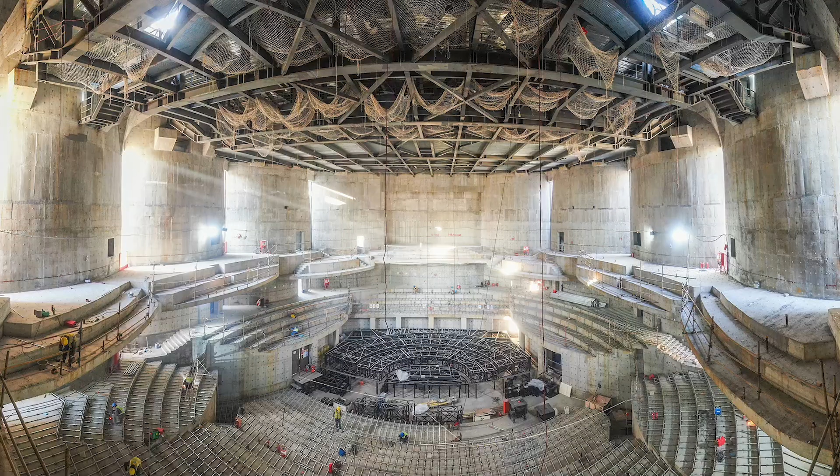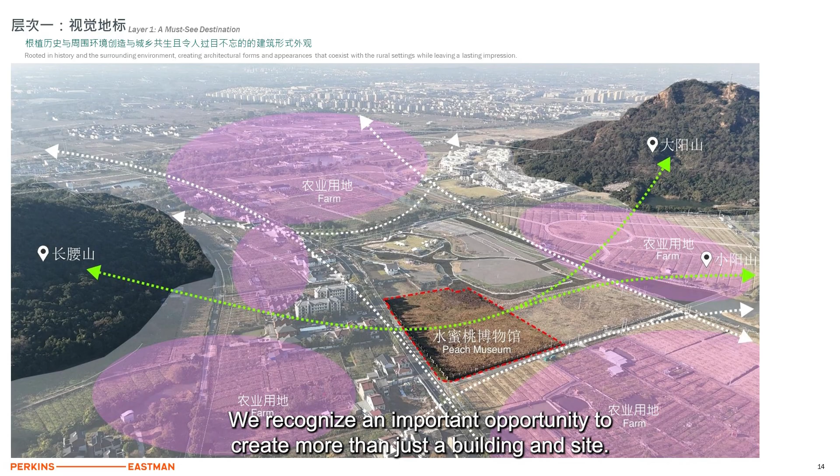We're fascinated by the potential of this Peach Museum project and the way it combines traditional museum exhibits with immersive environments, its integration of research space and meeting space, and its strong connection to the region. We recognize an important opportunity to create more than just a building and site. This can be a place that is richly layered with meaning.

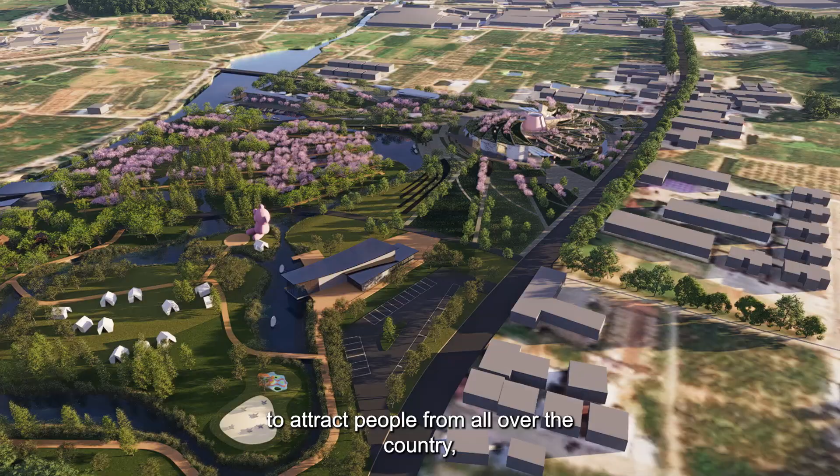It will start with how it looks. There's a high standard for how memorable a place must be to attract people from all over the country, and we feel we've crafted a design that will do exactly that. But this is more than just an aesthetic gesture. As with a person, there is truth under the skin, an emotional response, particularly given the significance of the topic of peaches and peach blossoms.

These emotions touch on a great tradition of Chinese poetry and painting. Our architecture aspires to work on that poetic level as well.

Then there's the historical dimension. The project and its museography should convey the deep historical context of peaches in China, a history thought to be more than 6,000 years old.

Another dimension of this project is the educational potential. The process of peach cultivation, a mixture of science and artistry that has developed over millennia, is fascinating and important. This can be a place where we teach future generations the beauty and importance of the craft.

And finally, we see a rare opportunity to make a museum that doesn't just show. It plays a role in the production and distribution of peaches. This will make it a unique museum experience.

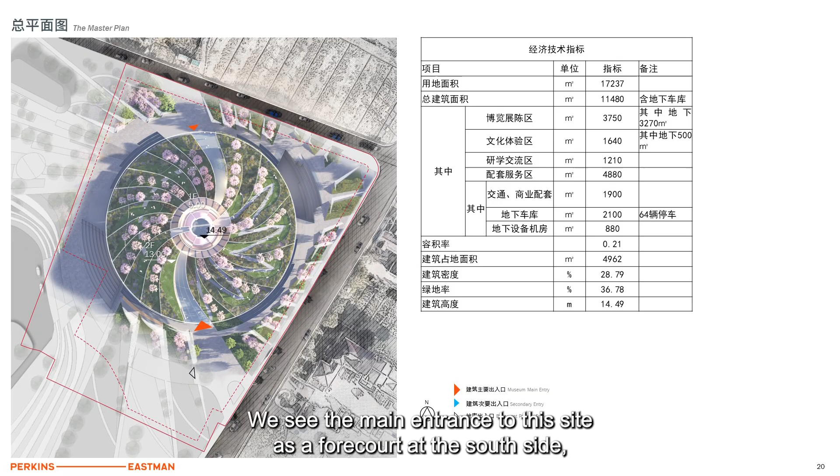Let's look at the project's fundamental organization, starting with the building itself. We see the main entrance to the site as a forecourt at the south side, allowing building entrance from the south in accordance with traditional planning principles for cultural buildings.

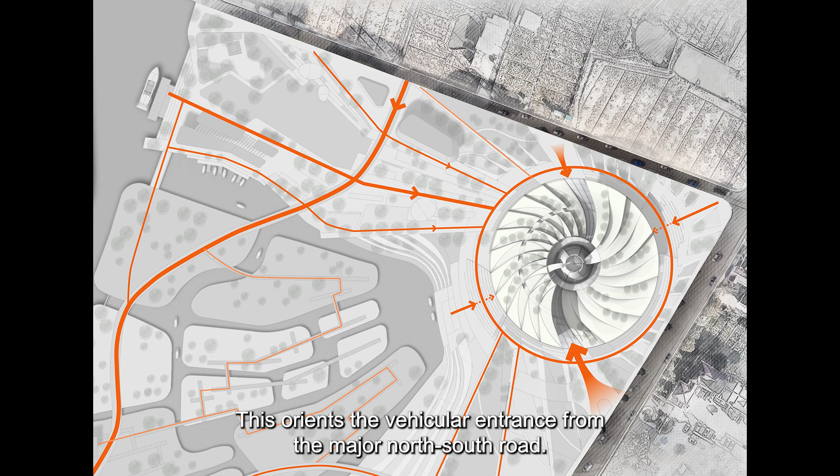This orients the vehicular entrance from the major north-south road. Parking access will also be from the southern zone and is fully accommodated below grade. A secondary entrance is from the smaller east-west road.

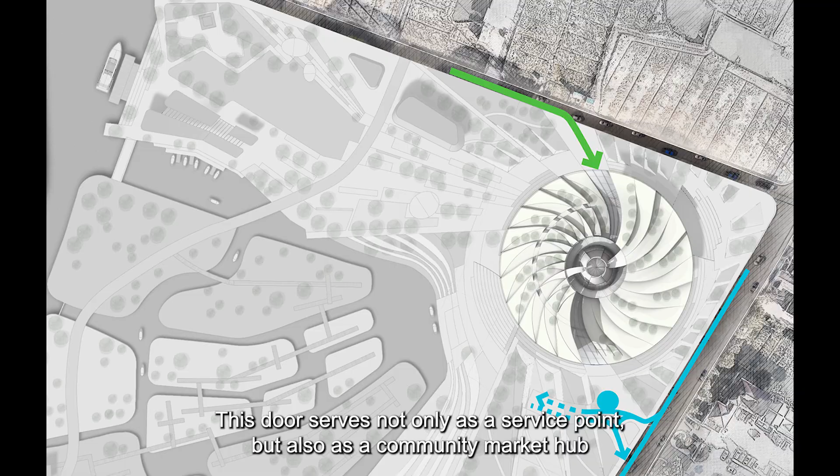This door serves not only as a service point, but also as a community market hub for sharing locally grown products year-round. It is a working connection between the surrounding farms and the museum.

Turning to the site, ecotourism continues to be a rising trend, and this project represents a rare opportunity to create a strong connection between nature, architecture, culture, and a sense of adventure.

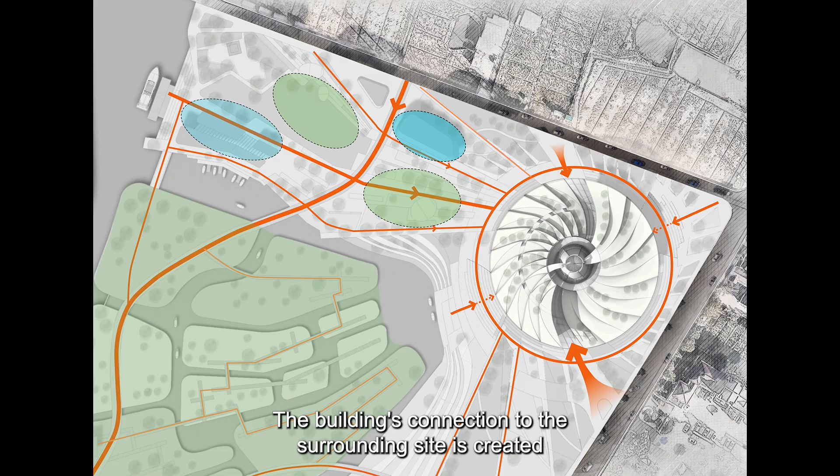The building's connection to the surrounding site is created with a network of walkways and waterways that extend the mission of the museum outward around the park and extend the fun, family-oriented character of the camping areas onto the museum grounds.

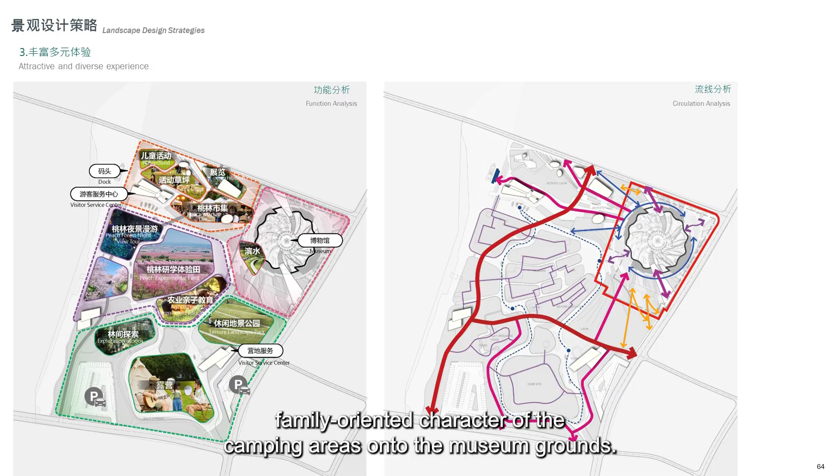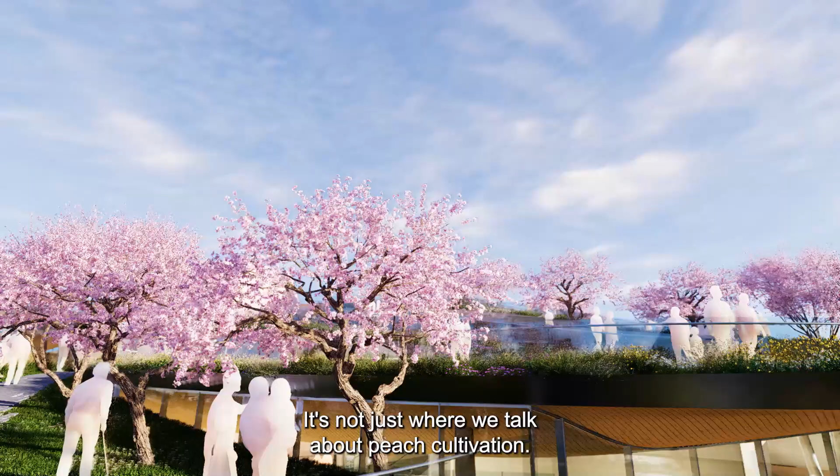We call our concept Harvest. It is thematically ambitious, aspiring to be a truly unique museum experience. It's not just where we talk about peach cultivation, it's where the cultivation happens.

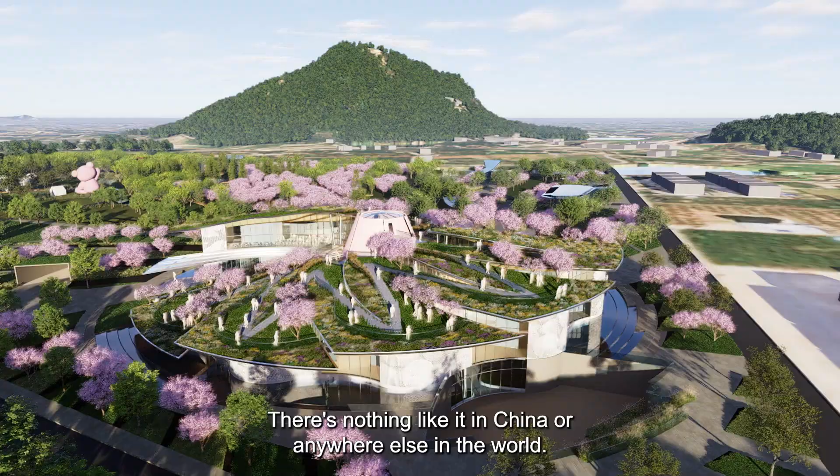It's equal parts experimental landscape design and bold architecture. It rises up from the earth to reveal, demonstrate, and celebrate. It is a working museum, a place of production. There's nothing like it in China or anywhere else in the world.

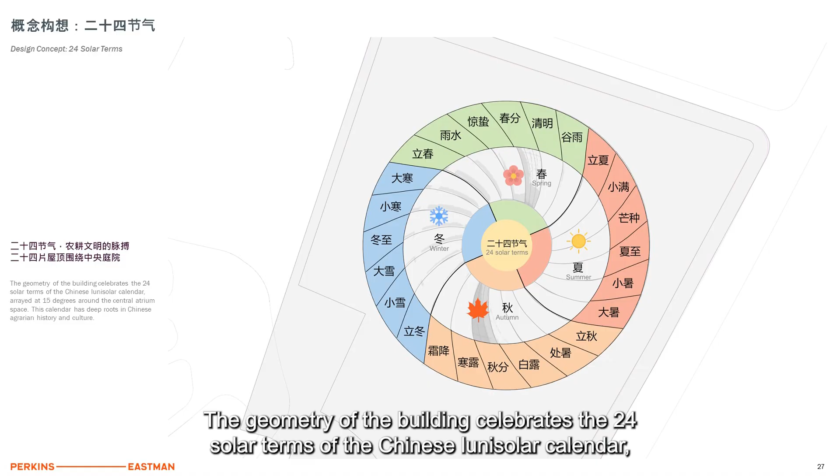The form of the architecture draws its meaning from elements of culture and science. The geometry of the building celebrates the 24 solar terms of the Chinese lunisolar calendar, arrayed at 15-degree increments around the central axis of the museum. This calendar has deep roots in Chinese agrarian history and culture.

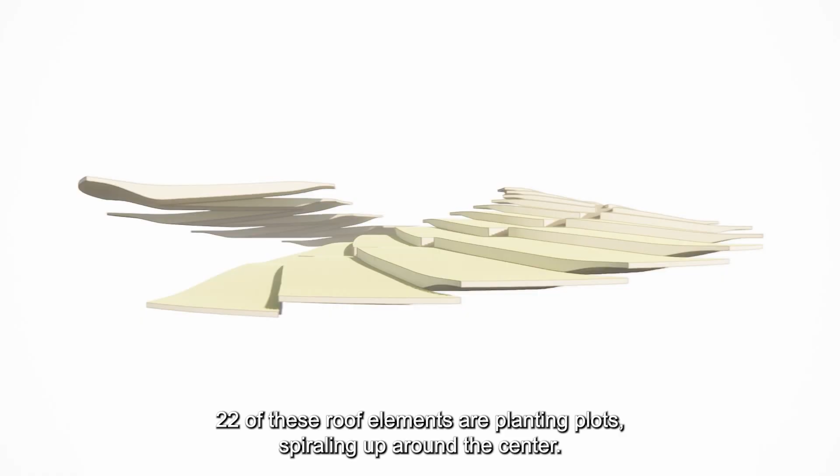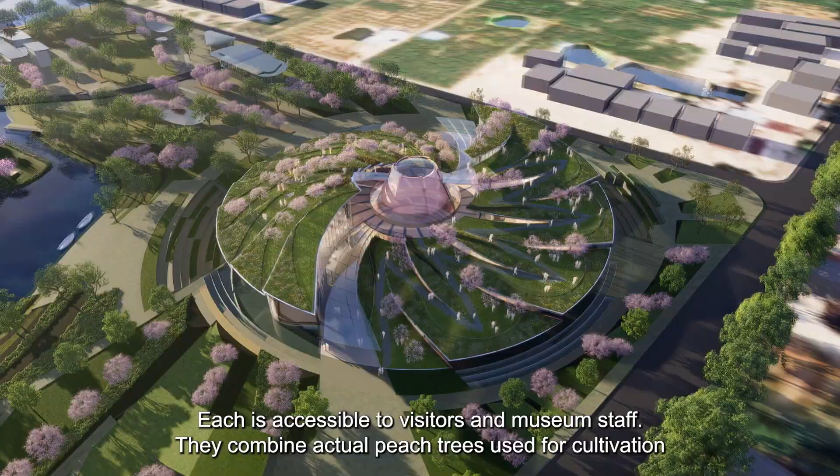22 of these roof elements are planting plots, spiraling up and around the center. Each is accessible to visitors and museum staff. They combine actual peach trees used for cultivation with an interpretive gardenscape that will be attractive year-round.

The whole building is a sort of machine for peach cultivation, with the formal museum entrance at the south and a more informal community front door anchored at the north. The museum experience is not restricted to the interior space.

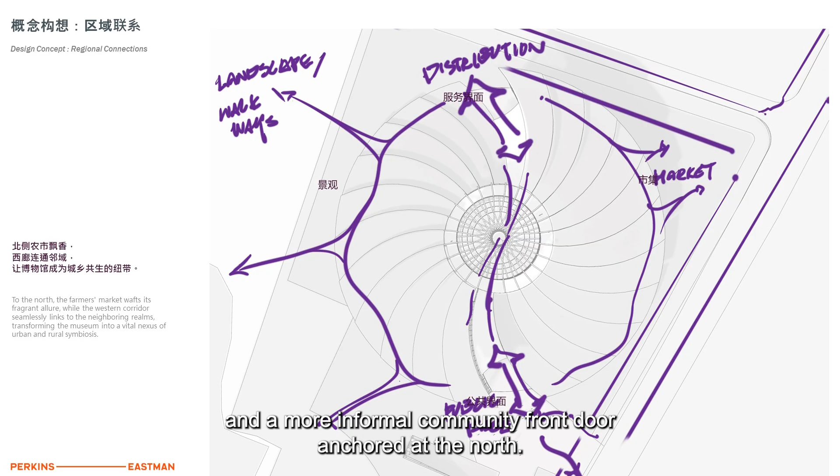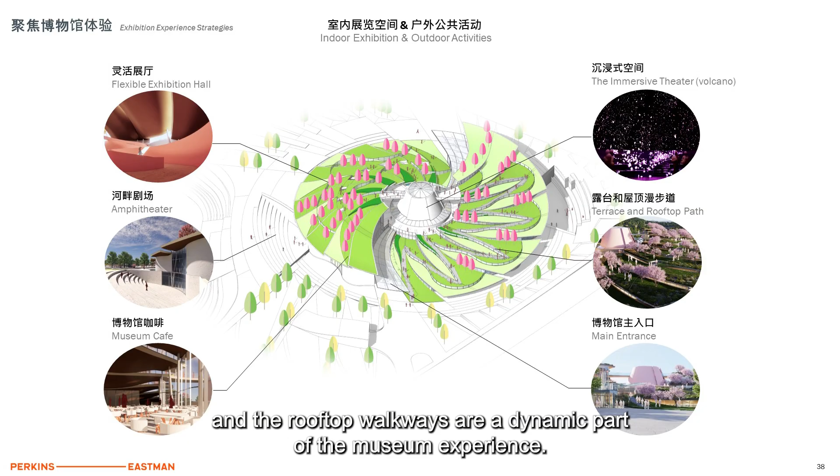2 amphitheaters create outdoor convening spaces, and the rooftop walkways are a dynamic part of the museum experience. The bilateral organization of the building expresses balance, balance between production and consumption, between work and leisure, and of course between the missions of the museum program: exhibition, research, meeting, and education.

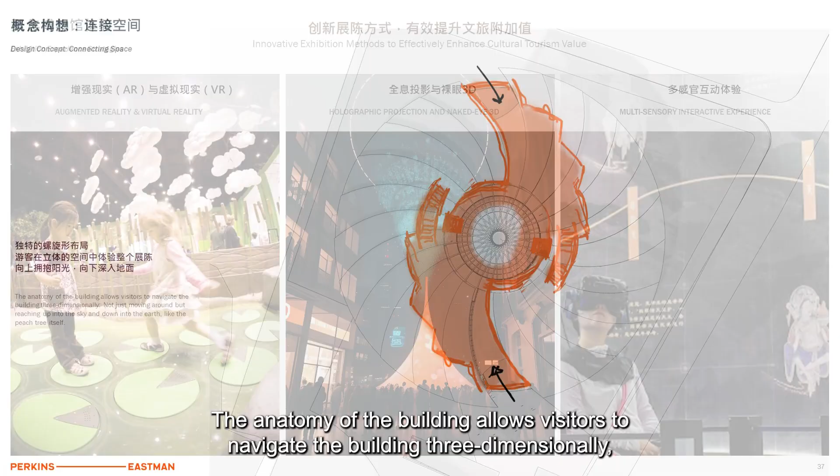The anatomy of the building allows visitors to navigate it three-dimensionally, not just moving around horizontally, but reaching up into the sky and down into the earth like the peach tree itself.

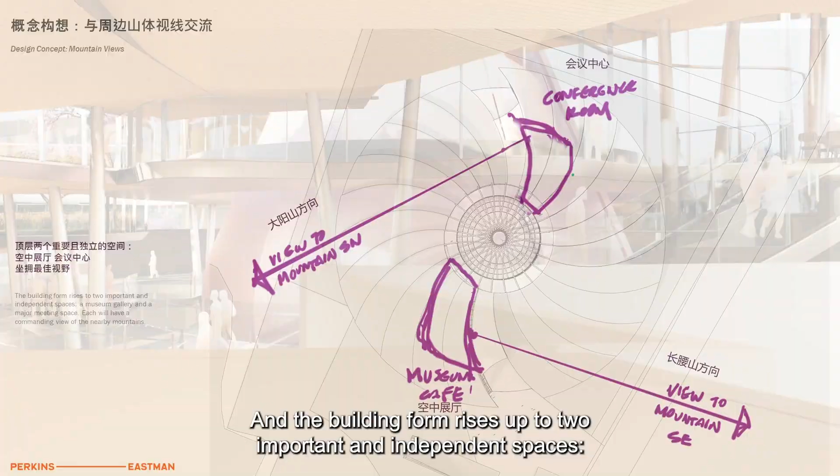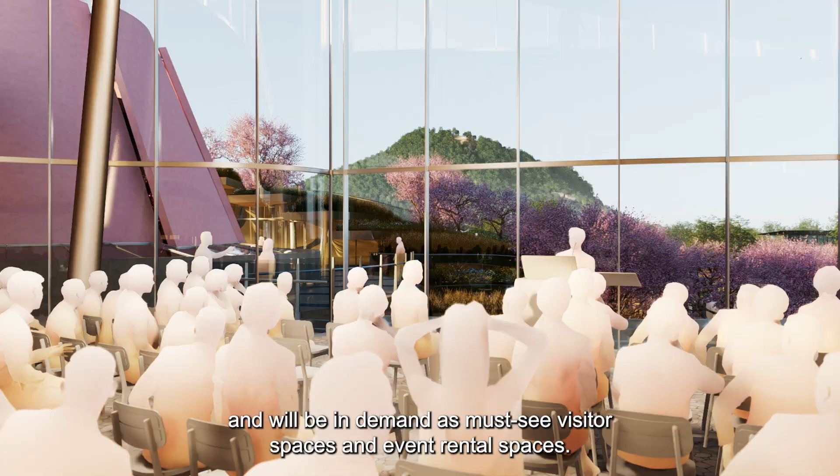The building form rises up to two important and independent spaces: a museum cafe and a major meeting space. Each will have a commanding view of the nearby mountains and will be in demand as must-see visitor spaces and event rental spaces. The epicenter of the building is an abstraction of volcanic form, recognizing the fundamental importance that volcanic soil plays in the success of peach cultivation in this region.

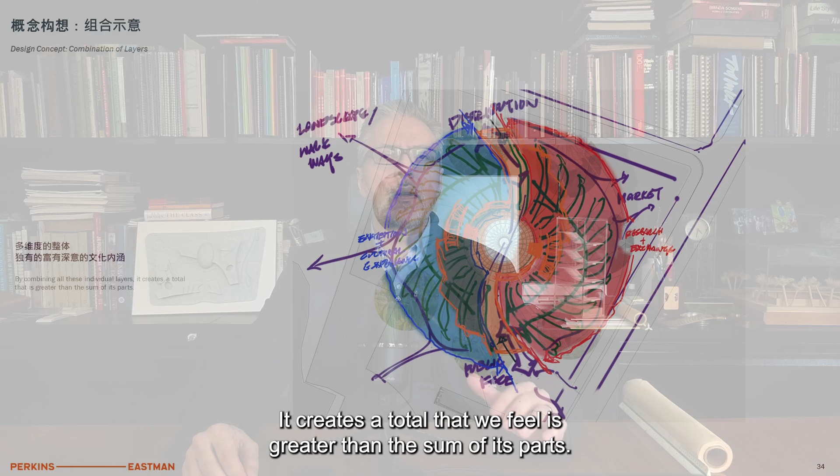The interior experience here will be extraordinary, and we'll describe that momentarily. The layering of all these meanings is important—it creates a total that we feel is greater than the sum of its parts. The form of the building is by nature aspirational, reaching up to the sky to capture light, water, and views.

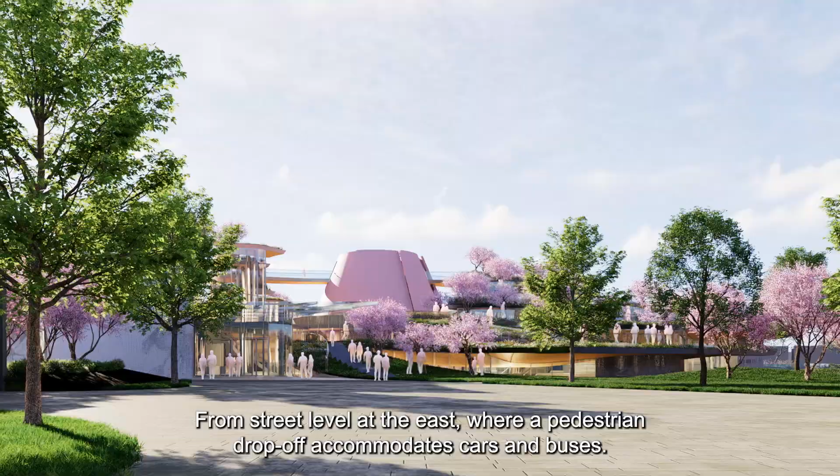Now let's focus on how these forms and spaces translate into the museum experience. Visitors will be able to arrive at the museum from several different vantage points: from street level at the east, where a pedestrian drop-off accommodates cars and buses. From here, cars can descend into the below-grade parking structure, where direct entry is also available for visitors.

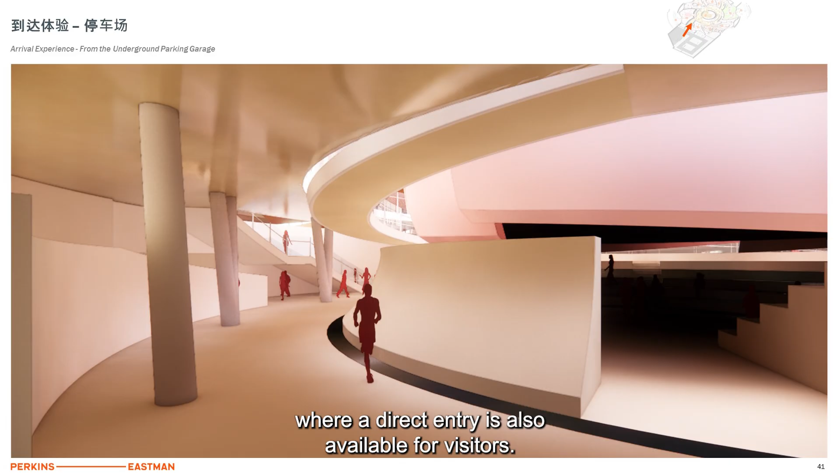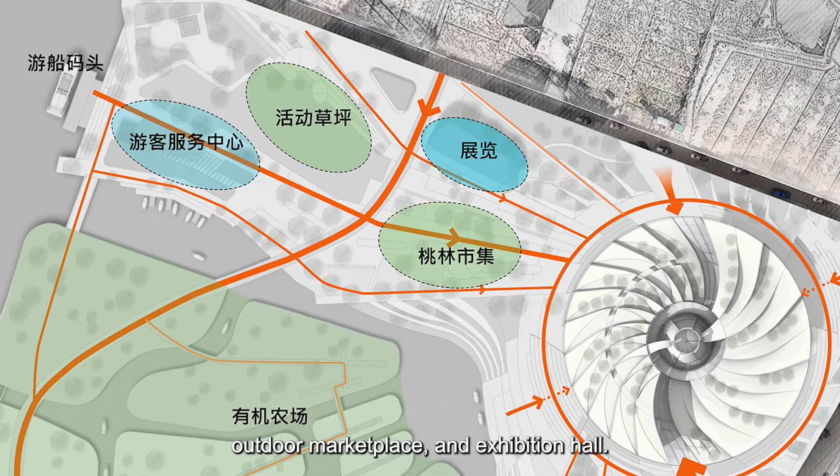Other visitors will arrive from a docking point at the river, where an elegant promenade provides a distinct experience from a visitor service center, across an event lawn, outdoor marketplace, and exhibition hall. Small-scale waterways within the park are also access routes for visitors within the park zone to reach the museum grounds.

At the entry level, a large central circulation zone provides clear wayfinding for visitors. We picture 4 major public-facing spaces arrayed around this center, each with curated views to the exterior.

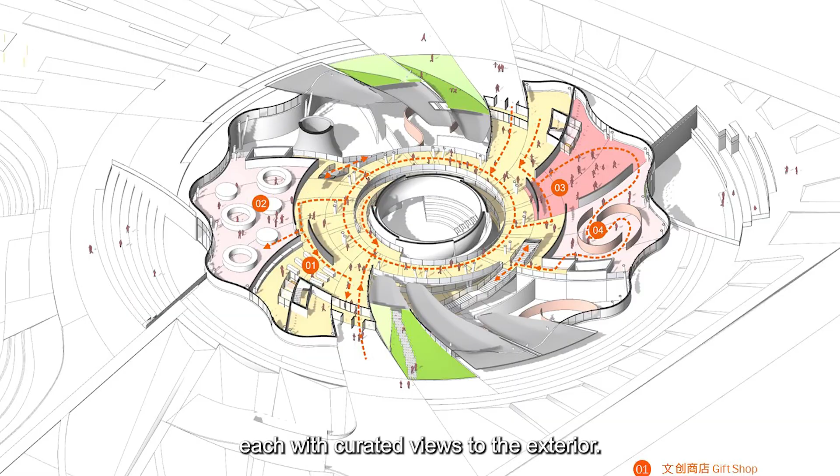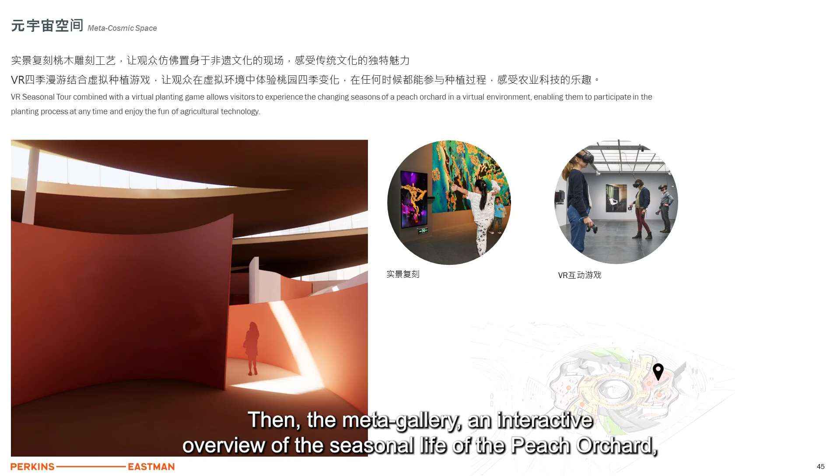First, the multipurpose hall is a flexible exhibition and community space. Then, the Meta Gallery, an interactive overview of the seasonal life of the peach orchard, where visitors can place themselves in the orchard and gain an overall understanding of the cultivation process.

Then there's the Creative Lab, where we're first exposed to the cultural and artistic resonance of the peach harvest, from art to poetry and literature. Visitors are invited here to a range of activities from the purely observational to the participatory. And of course, the gift shop plays an essential role for the museum, allowing visitors to carry away a physical memory of their experience here.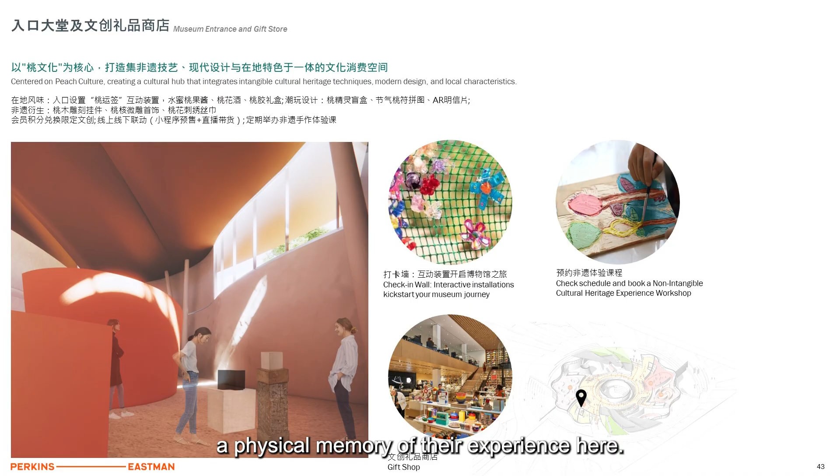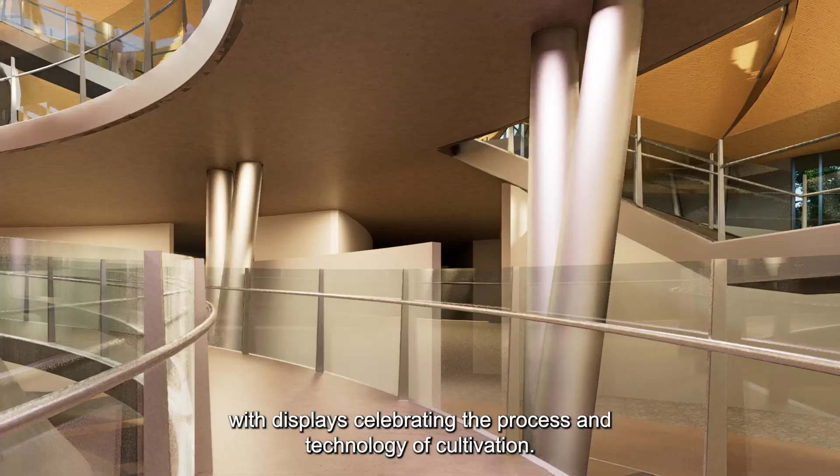As we descend to the lower level, we're figuratively and literally digging deeper into the meaning of the harvest. The ramp itself is an educational journey with displays celebrating the process and technology of cultivation.

The galleries at this lower level have an important organizational premise. They can be experienced enfilade, that is, passing directly from one gallery to the next. Or, for those needing a moment of respite, there's always the option to step out into the central circulation zone, where there's an airy and open feel with daylight piercing the interior and comfortable seating throughout.

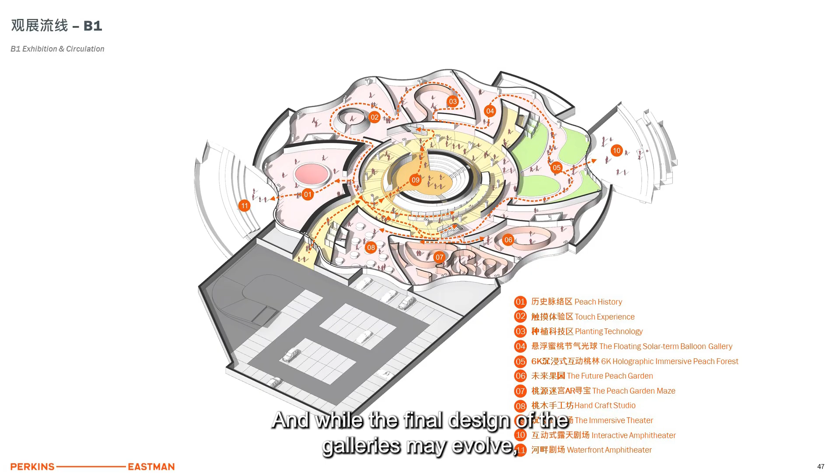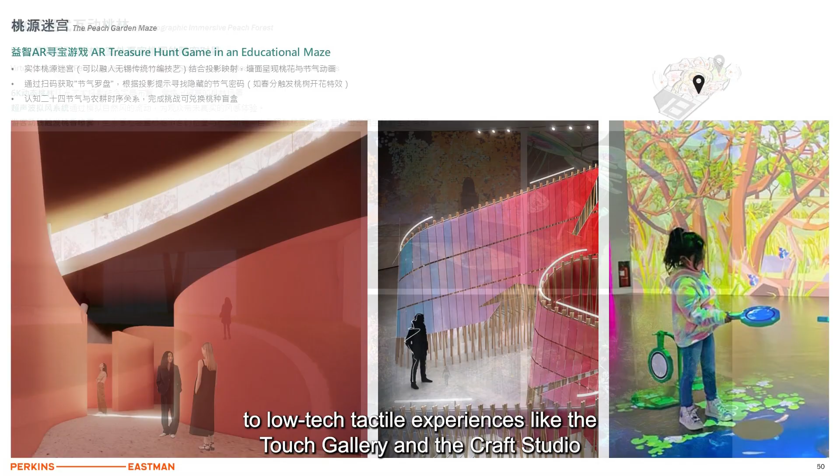And while the final design of the galleries may evolve, we've developed a vision for a suite of gallery environments that vary from high-tech spaces featuring VR and naked eye 3D technology to low-tech tactile experiences like the Touch Gallery and the Craft Studio, to the memorable experience of the Peach Garden Maze. At this level, we're able to modulate the penetration of daylight in service of this dynamic gallery experience.

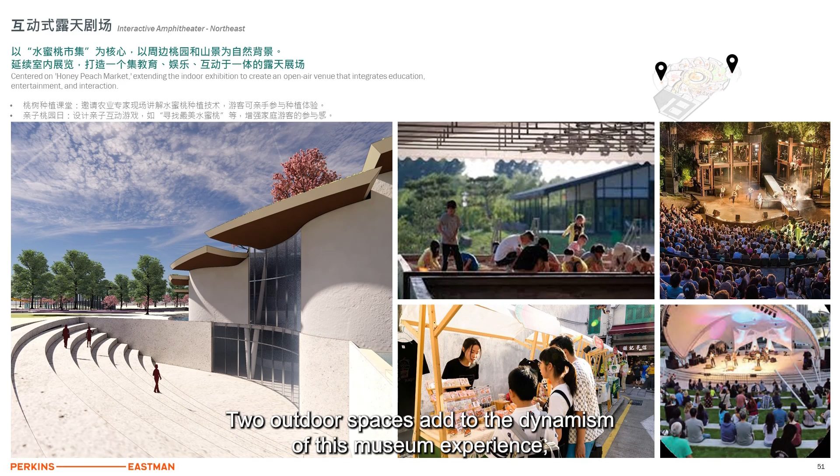2 outdoor spaces add to the dynamism of this museum experience, allowing for the exhibition of real plantings, or for a sculpture gallery, or teaching or performance spaces.

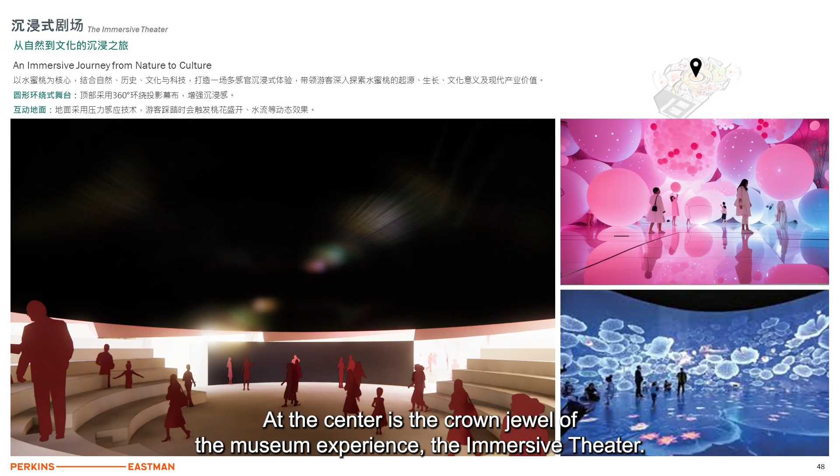At the center is the crown jewel of the museum experience, the immersive theater, architecturally inspired by the volcanic geology that is so important to this region. This 360-degree digital experience will transport large groups of viewers to a new level of understanding and experience. In this room, the environment can transform from an ancient forest to the interior of a volcano to the cellular matrix of a tree's structure.

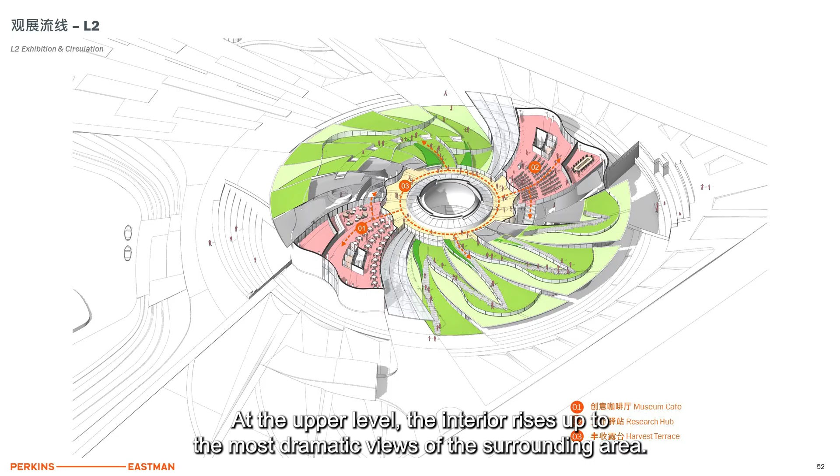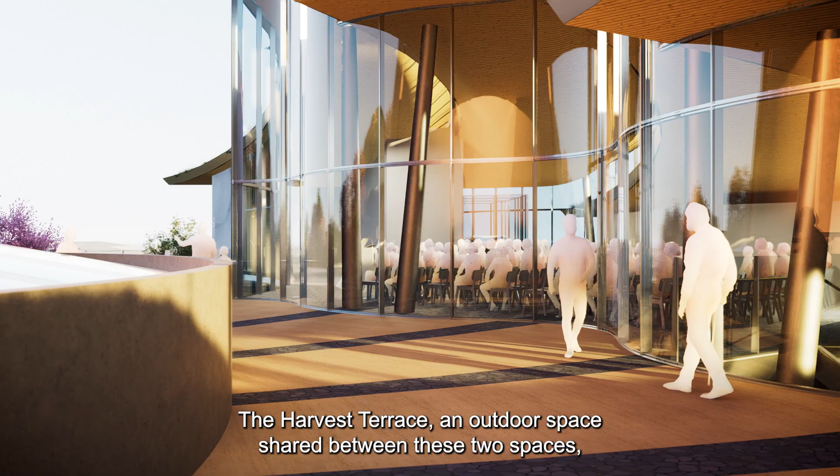At the upper level, the interior rises up to the most dramatic views of the surrounding area. The museum cafe will have a commanding view of Changyao Mountain, and the research hub will have an equally stunning view towards Dayang Mountain. The Harvest Terrace, an outdoor space shared between these two spaces, can be used as an extension of these spaces or for separate events.

The museum journey continues outside the walls of the building. The rooftop is first and foremost a formal garden experience in the tradition of Versailles, or the Villa d'Este, where we can delight in the shade of trees and the smells from flowers and the views of the surrounding landscape from a continuously rising elevation above ground.

Each side of the rooftop also has its own character. The meandering slow path on the east side includes seating areas, hammocks, outdoor exhibits, encouraging a thoughtful traverse. This side is gently sloped to accommodate the passage of wheelchairs and strollers. The network of stairs on the west side access a set of garden spaces with their own unique character.

Between these two sides, there is a reward for the visitors who've risen to the top. The Panopticon is a portion of the immersive theater that is only accessible from this level. This display is a modern take on the panorama. The panorama was the very first immersive exhibit from 1787, predating even photographic technology.

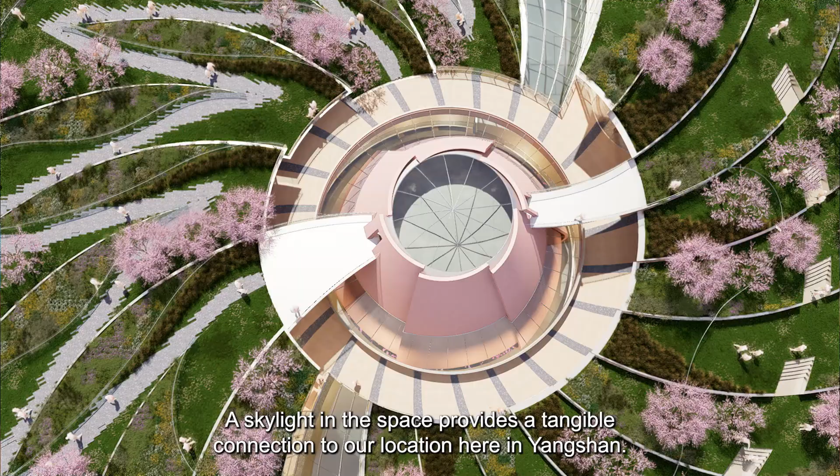Here, the 360-degree display allows visitors to look back in time or into the future, or to change their location to elsewhere in the world. A skylight in the space provides a tangible connection to our location here in Yangshan.

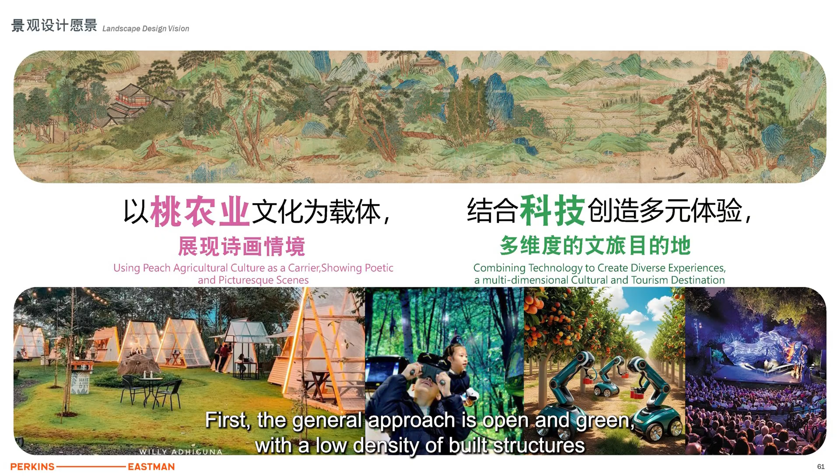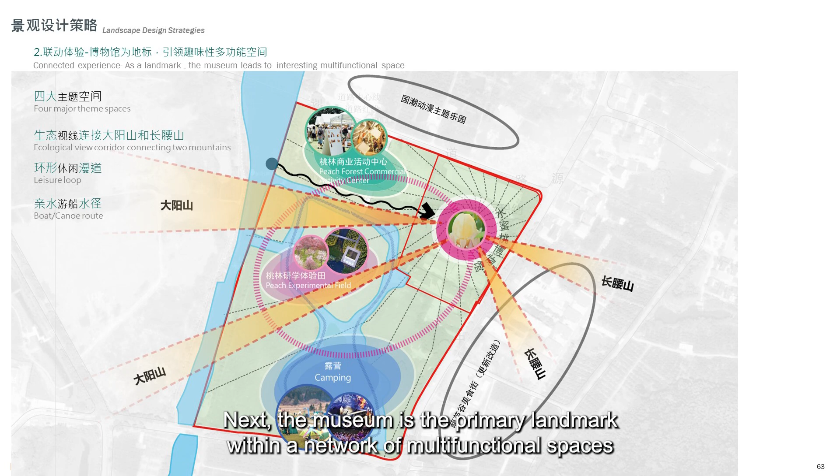The landscape design is based on a few fundamental tenets. First, the general approach is open and green, with a low density of built structures in response not just to the museum's mission, but also in recognition to its location among farmland and between the green valleys adjoining the nearby mountains. Next, the museum is the primary landmark within a network of multifunctional spaces connected by walkways and waterways.

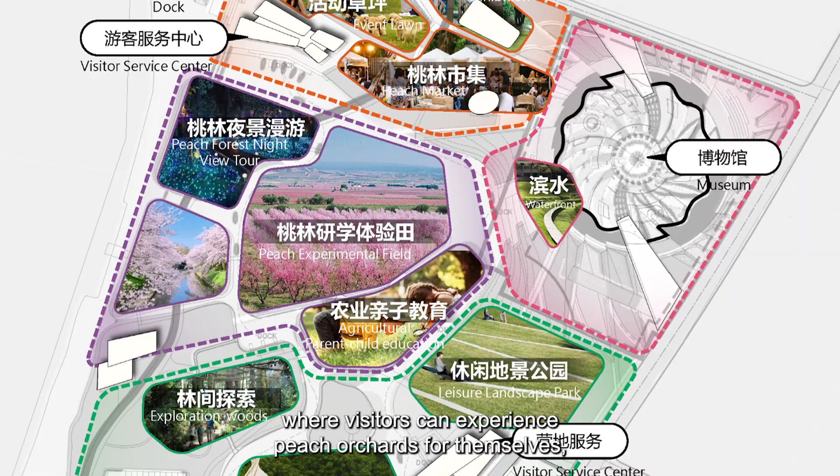Of importance to us is that these aren't just pathways, but also an opportunity to create real places in the landscape that are destinations of their own. The experimental peach field, for instance, where visitors can experience peach orchards for themselves, an agricultural education zone, a forestscape, an event lawn, and the existing campground as well.

In this way, seasonal changes can be celebrated throughout the landscape, while maintaining a beautiful year-round appearance on the museum building itself.

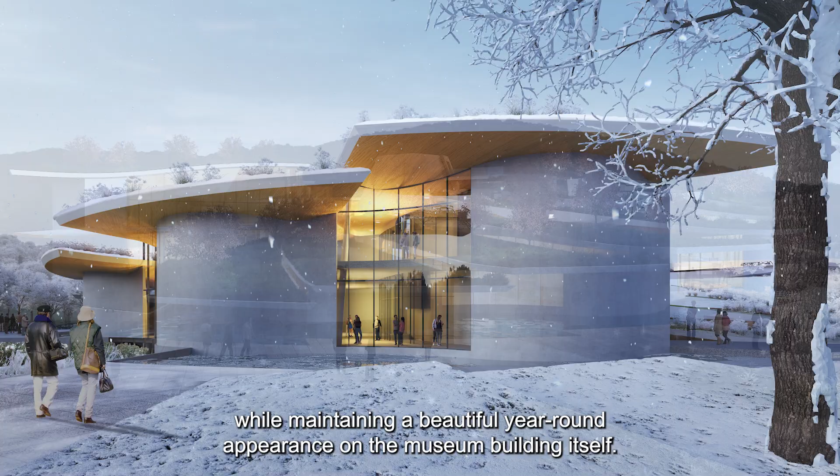The site and landscape are a good transition point to discuss sustainability for the project, because our most impactful initiatives begin here.

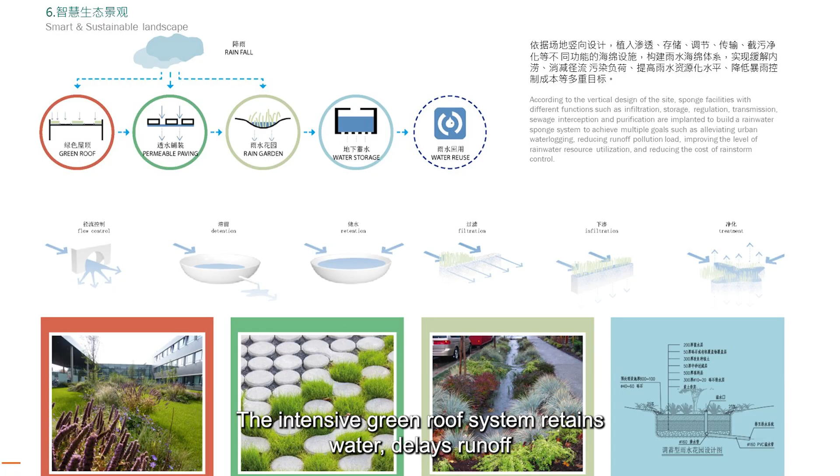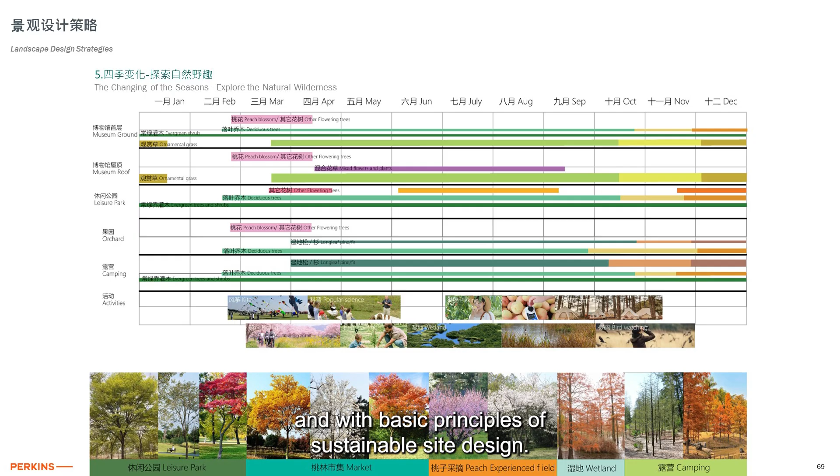The intensive green roof system retains water, delays runoff, and will allow us to minimize the need for irrigation systems. The use of native plantings is consistent with the mission of the museum and with basic principles of sustainable site design. This has the added benefit of reducing the requirements for maintenance as well.

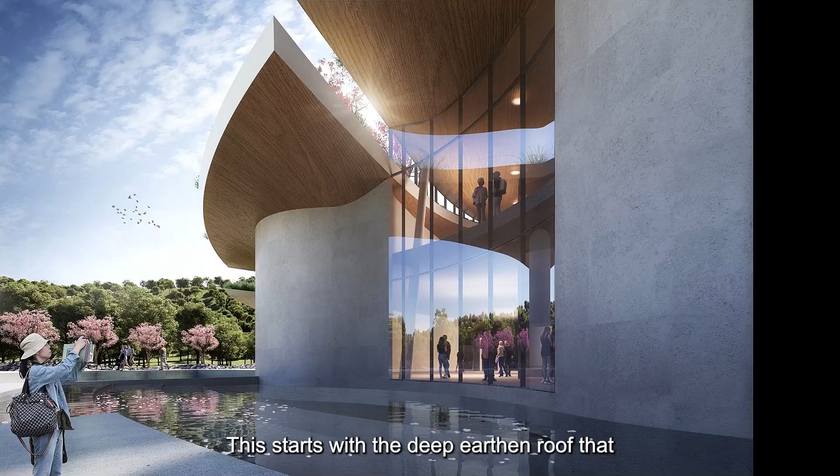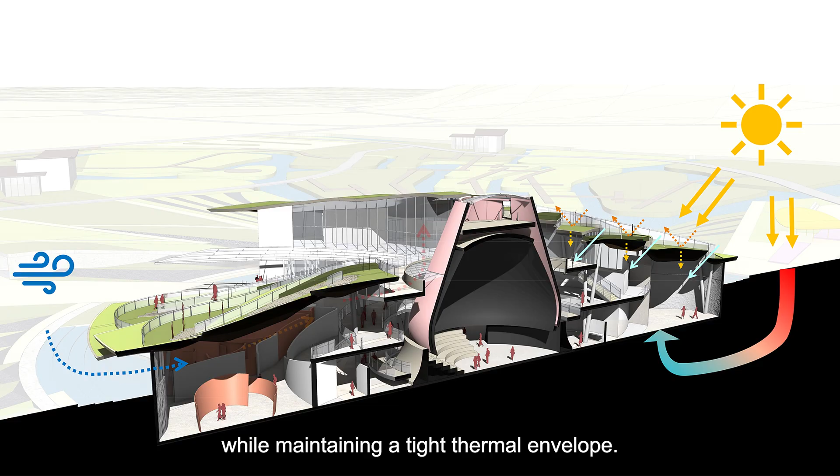At the building, a key goal is to provide a super insulated building envelope. This starts with the deep earthen roof that we're using as a planting medium, the highly stable thermal conditions of the below-grade spaces, and continues to the exterior walls, which have an overall glazing ratio of less than 35%. We're using daylight strategically to animate the interior while maintaining a tight thermal envelope.

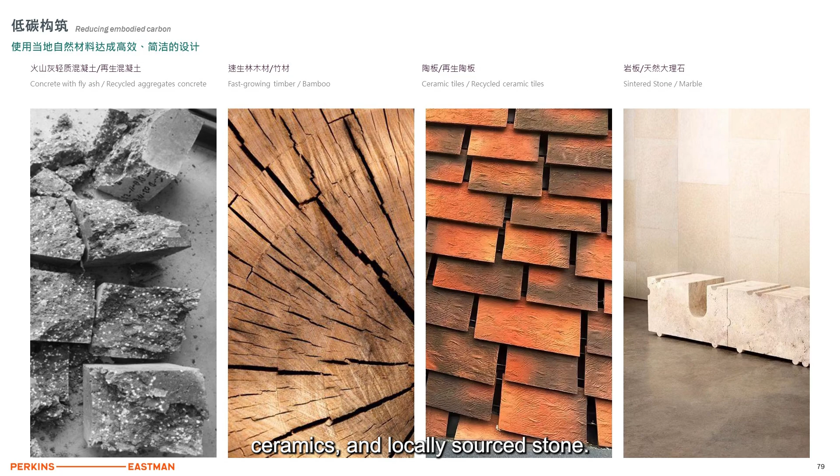We do see an opportunity for renewable energy in the form of a small-scale wind turbine network arrayed around the site. This would be consistent also with the overall educational mission of the museum and site. To reduce the embodied carbon from construction, we propose a simple set of materials, including fast-growing bamboo, recycled ceramics, and locally sourced stone. We envision a cooling and heating system as elegant and simple as the building itself.

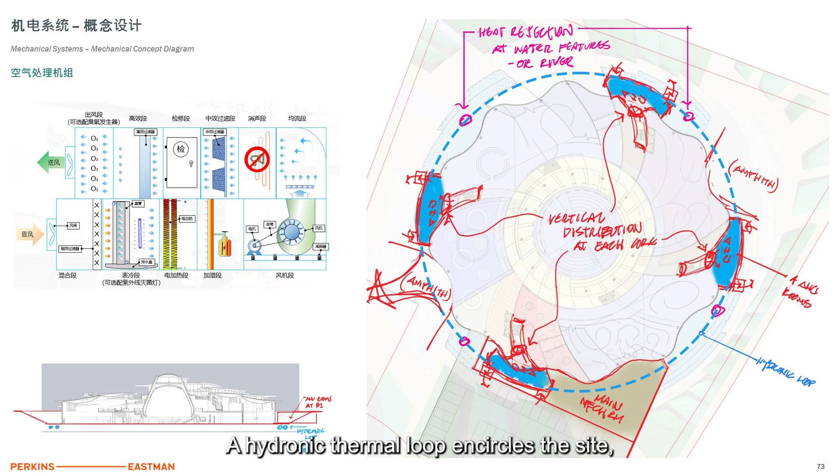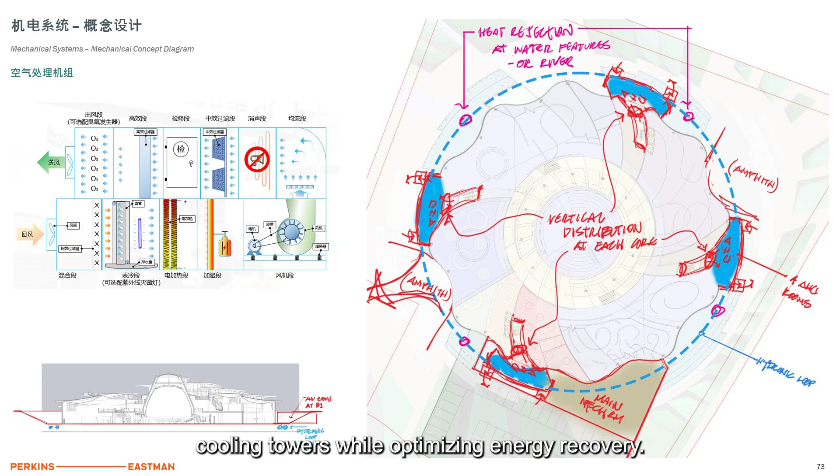A hydronic thermal loop encircles the site, feeding fan rooms at each vertical core and connecting to a central heat pump cooling plant that can reject heat to the adjacent waterways, obviating the need for unsightly and noisy cooling towers while optimizing energy recovery. The structural system is also conceived with simplicity in mind.

The V-shaped columns are meant to address both gravity and lateral forces. With the likely use of concrete as the fundamental building material, we recommend a fly ash admixture to further reduce the building's carbon footprint. There's a very practical, low-tech aspect of the building's sustainability that is important to us.

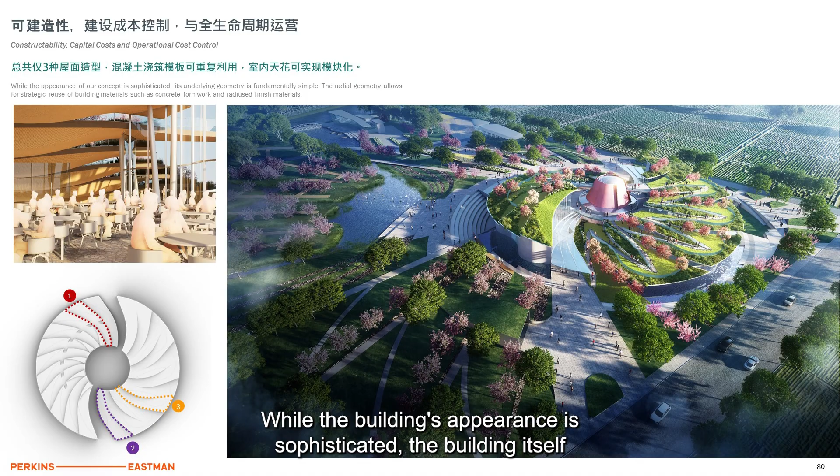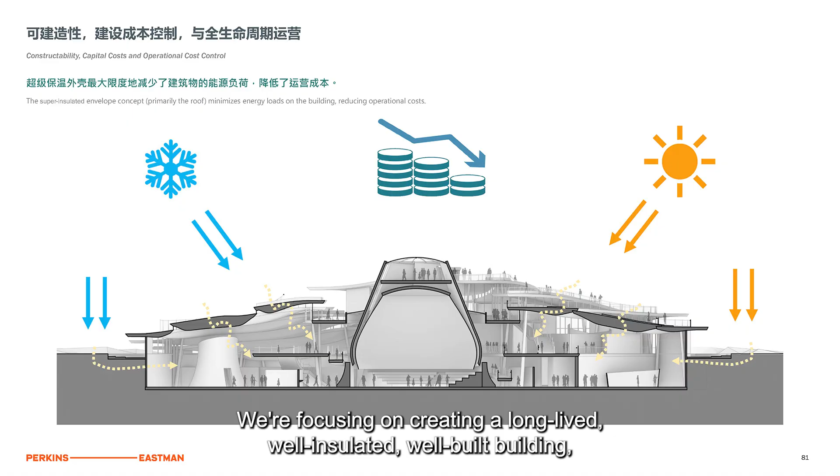While the building's appearance is sophisticated, the building itself is made of simple geometric forms that strategically repeat. Formwork can be reused throughout the building to minimize cost and complexity. We're focusing on creating a long-lived, well-insulated, well-built building, rather than on fancy systems, to increase energy efficiency and minimize ongoing costs of maintenance. As an institutional work of architecture, we intend for this to be a 100-year building.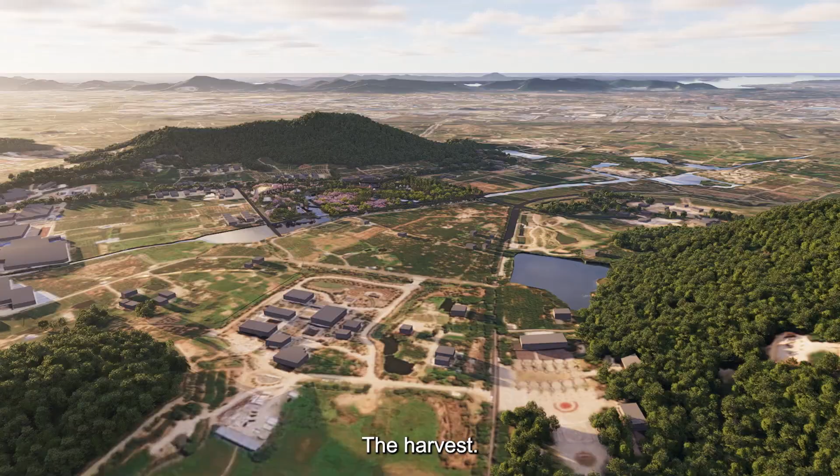The harvest. The form of the building rises from the landscape, creating a memorable and iconic architectural presence while drawing us into the interior. We're aiming for something poetic and profound, for more than just a building.

Think of the story of the peach blossom spring, where the fisherman discovers an otherworldly and beautiful place. When we enter here, we enter both a building and a landscape, a world of discovery and refuge, to which we will long to return again and again.